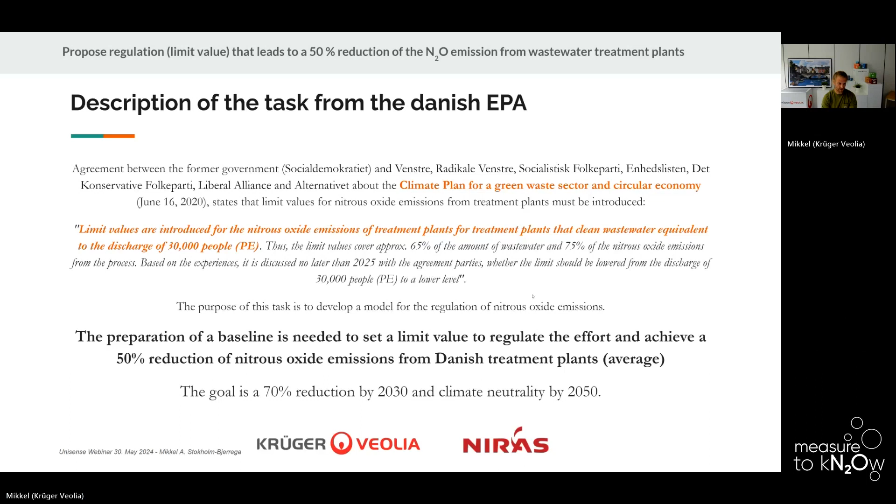Back in 2020, the former government decided that we needed to take action on climate gas emissions from nitrous oxide in wastewater treatment plants. So they decided on a goal to implement a limit value for N2O emissions for all Danish wastewater treatment plants treating wastewater for more than 30,000 people equivalents. It is a 50% reduction target with an expectation to increase this to a 70% reduction by 2030. The 50% reduction is to be in effect from 2025. So it is quite close.

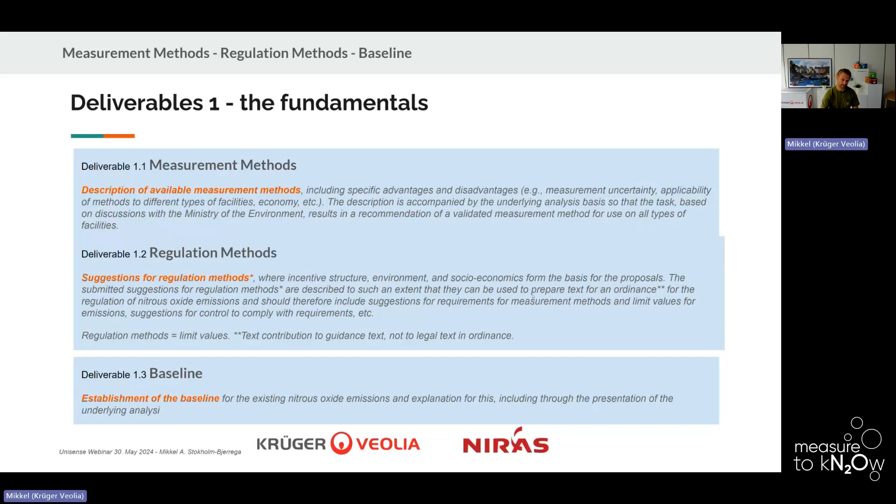The work we have done here, we have done together with another consultancy company called NIRAS. It was divided into two sections, a fundamentals section and an implementation section. In the fundamentals section, we cover three areas: the measurement methods, the regulation methods, and considerations on the actual baseline from Denmark on nitrous oxide emissions. In the implementation section, we include perspectives on guidelines for how to measure and how to control or regulate. We also consider effects of including treatment plants smaller than those treating 30,000 PE and more. And then we consider, among other things, costs and shadow prices of measuring and mitigating to the target of a 50% reduction.

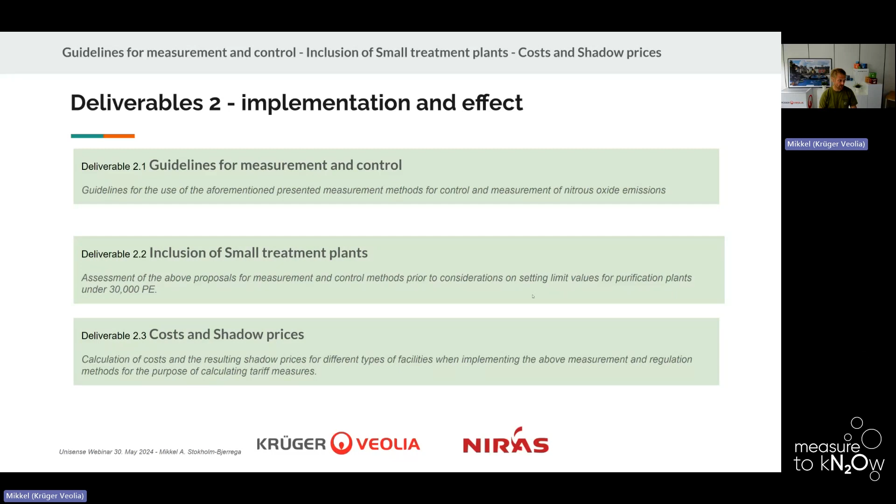So jumping straight into it, measuring methods to measure accurately. There are two basic principles that we covered, 4 methods and many technologies, but in essence, still few solutions. The overall goal is, of course, to determine the actual N2O emissions. To do that, there are two principal methods, as we see it. One is the process-specific measurements, which include a local, often online sensor or online analyzer, with off-gas sensors or liquid sensors. The off-gas sensors are often made up of a gas hood and an associated analyzer.

Those are process-specific methods. Then we have the plant-wide methods, of which in this case we considered two: the trace gas dispersion method and the drone flux method. Both of these methods measure, or aim to measure at least, the actual combined emissions from a whole wastewater treatment plant. And this also covered chimney off-gas measurements from covered plants, which obviously also include the whole emissions of the plant.

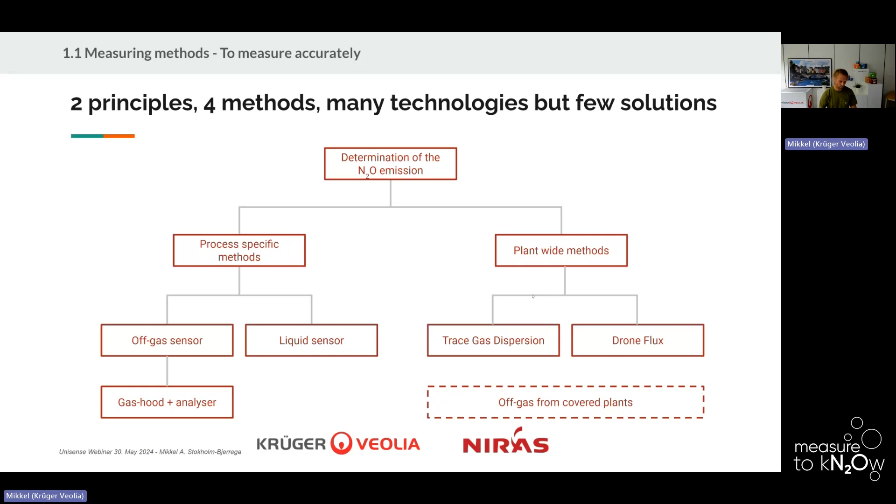So that is the basic difference: the process-specific measurements often include online sensors placed at a local point in the wastewater treatment plant, measuring frequently and online, but require further data post-treatment to calculate or estimate the full plant emission, whereas the plant-wide methods tend to be more of a spot sample, which is not online, but include the whole plant emissions. Those are the basic differences between the two.

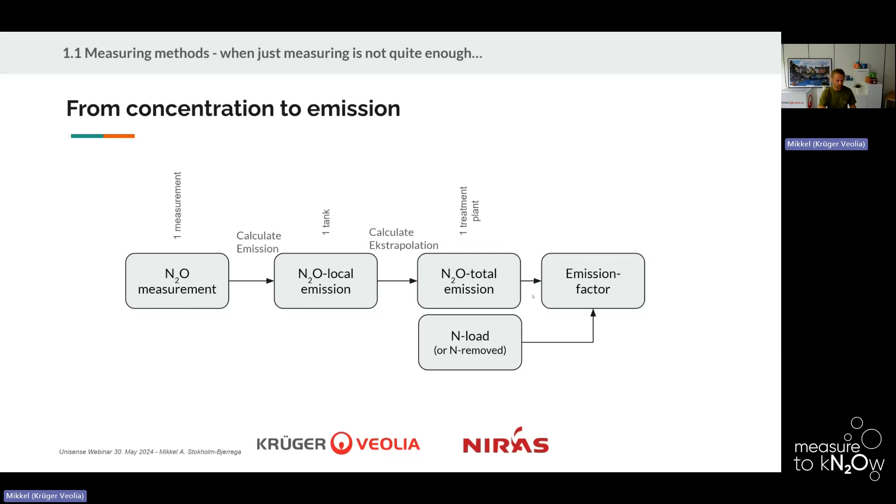And in that, you need to add knowledge of the nitrogen load to the plant in order to calculate the emission factor. All of these steps from concentration to emission are associated with uncertainty, but it's important to represent the true emission of a treatment plant. And especially if the goal is to document the effect of mitigation strategies, it's important to have comparable measurements of the emission factor before and after. Also, if you want to compare between plants, it is important to have comparable ways of doing this.

Very basically, the first question one needs to ask is whether you want to apply an absolute or relative limit value. So is it kilograms total per year of nitrous oxide that is the target, or is it a percent emission factor, for instance? Further on, for each of the categories, you have various ways of constructing a limit. You can do a fixed limit, which is the same for all treatment plants. You can have a differentiated limit, maybe stricter for large plants and less for small, or the other way around. You can have a relative limit dependent on previous baseline measurements, and then it's a 50% reduction based on that. So the targets are differentiated because you have a different starting point.

You could also impose an individual limit that is corrected for the potential or ease of mitigation for the plant, so that plants with a large potential for greater reduction have a stricter limit than those who have a real challenge in doing so because they are overloaded and challenged in capacity, for instance. All of these issues need to be considered before constructing the actual limit value.

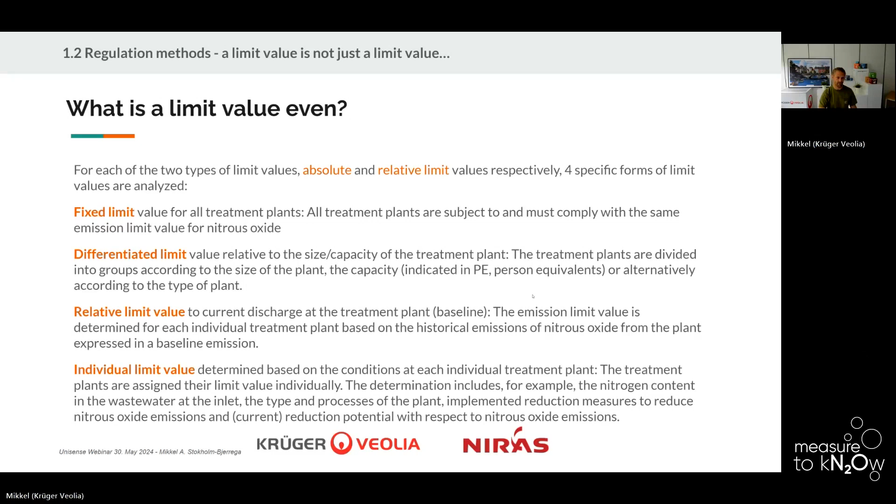Again, the target here was a 50% reduction using a limit value. It makes sense to go further with an emission factor, which would then be the relative limit. And it is also meaningful to have a realistic starting point, perhaps starting with a fixed value, and then over the years, as knowledge increases, move more and more towards individually adapted limit values. But obviously, those require more background knowledge before being able to do that in a fair and cost-effective way.

So what is the starting point even? Because the government here was very ambitious, and they stated an ambition of a 50% reduction without perhaps truly knowing what the starting point was. Thankfully, we already had a previous project trying to determine the national specific emission factor for Denmark. In this study, it was shown that in Denmark we have an emission factor of 0.84%, which is lower than the IPCC value for Europe in general. But it is not based on a large number of wastewater treatment plants, but a selected few participating in the project. As part of this project, we tried to extend that data foundation to validate whether this value was representative of the national state in general.

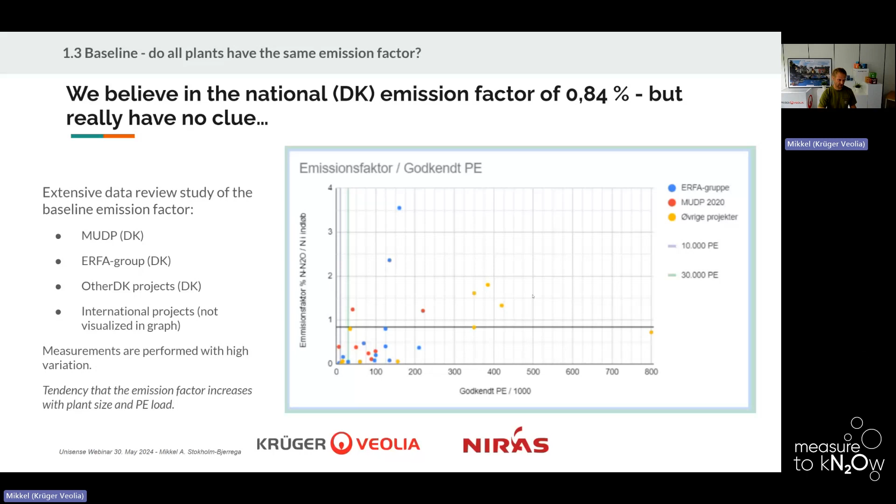What comes first? This regulation could be the approach to start having more intensive measuring in order to create the knowledge foundation that is needed to adjust the baseline and do the right regulation in the end.

So also we need, of course, to balance the effort we put into measuring and mitigating with the cost associated with it. So we speculate that there might be two methods to do measurement and control of the emission factors of the treatment plants. We call these the basic method and the extended method.

The basic method is in essence that we put only one measuring point in every type of aerated biological process. This would mean that if you can argue that you have 4 or 8 identical activated sludge treatment plants operated in the same way, with the same conditions, with the same behavior, you only need to put a sensor in one.

You can then estimate or guess the anoxic contribution of the emission factors of that treatment plant, and no need to do further additional analysis of nitrogen loading in excess of what is already required by the regulation. A very basic method, primarily designed to increase the knowledge and specify the correctness of the chosen baseline for Denmark.

Then there is also the opportunity to do an extended method, which then would require a measuring point in every aerated biological process, and not just every type, but every actual biological process. It would also require a measurement for more precise estimation of the anoxic contribution, and then extrapolation to full-scale emissions.

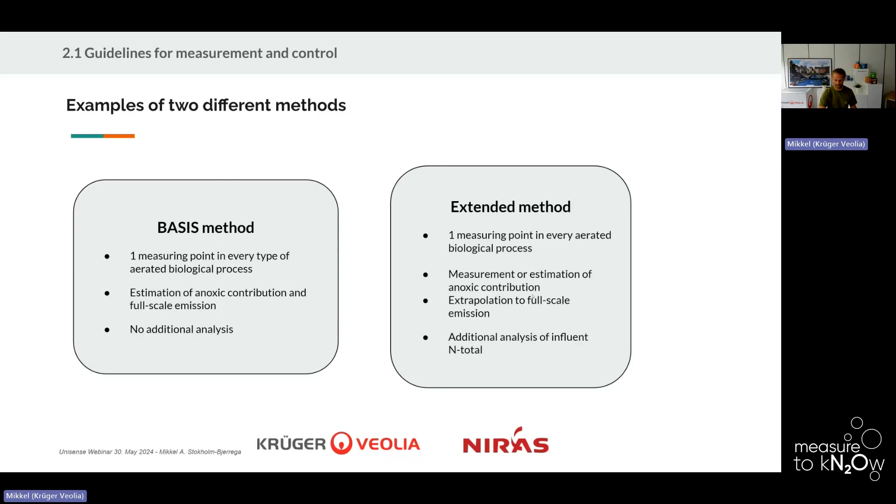It will also require additional analysis of the influent N-total to increase the precision of the calculated emission factors for the plant. We speculate that this could be done in an approach such as this, where the first year after implementation of this regulation would cover a baseline period, a screening period, where we have the opportunity to gain excess knowledge of the actual baseline, and also gain insight into whether or not there is a large diversity of the emission factors between plants

or a small diversity between plants. This is important when we want to calculate the effect of a specific limit value, and whether or not it is able to achieve the overall 50% reduction. Therefore, it also includes the possibility to do a review of the limit value in between or after the first year before going forward.

The point is then, with the one sensor in one tank in all plants, if that sensor implies that we have a treatment plant that is above the limit value, it triggers the need for application of the extended method, where the plants then need to install more sensors or analysis in the plant to increase the validity of the estimated full plant emissions.

So that is the first step to see, okay, that calculated emission value that is above the limit, is it actually above the limit, or is it a measuring diversity, or not an error, but is it insufficient to describe the true full-scale emission from the plant? If that is then the case, it also triggers the need for mitigation for that.

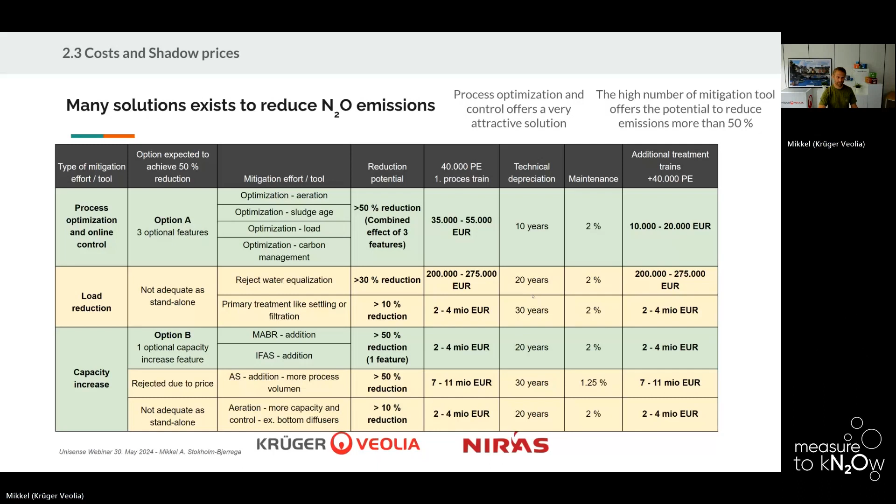So to wrap up, we estimate that it is possible in practice to introduce a measurement method and a regulation method that can be brought into play already from 2025 in Denmark. The current baseline we have established is a good starting point, but it is essential that it is qualified when the measurement program is implemented and we gain a lot more knowledge of all the plants that have not so far been measured. The limit value can be arranged so that it is effective, realistic, and fair.

There are reduction measures available that are expected to be able to reduce all of the plant emissions to below the limit value. It also appears that most can be done at a competitive and cost-effective shadow price. And if all treatment plants above 30,000 PE follow the basis method, measurement capex is estimated at 1 to 2 million euros, with a yearly maintenance cost of 0.2 to 0.3 million euro per year, depending on the measuring type. There are, of course, large uncertainties related to this guesstimate.

The optimal estimated cost of measuring and reducing nitrous oxide by 50% offers a potential shadow price down to 6.5 euros per ton. That is, of course, the optimistic target, but just to show. Then on top of this, some mitigations, as chosen before, might even have other substantial added benefits. Some of these solutions could also improve the overall treatment performance of the plant, by improving the nitrogen removal, for instance, or carbon management.

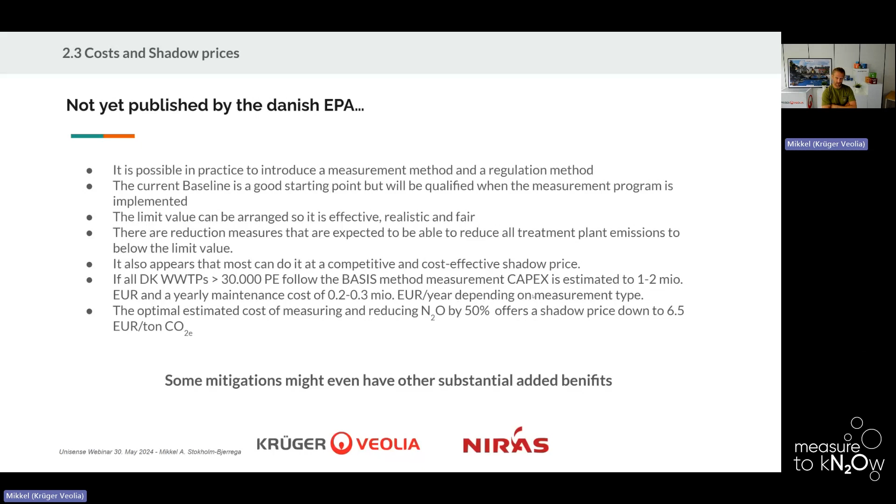Okay. Good. Just credits for the team, Veolia and NIRAS participated in this.

And then I have this final one because I also promised in the presentation to cover a little bit about the development project that we have here in Krüger. This is because, as you saw in the table before, there are a lot of estimates on the effect of mitigation strategies. And we believe and hope that the combination of strategies here are able to

Did my presentation stop now, Christian? No, it's running. I hate to rush you, but we have an absolute maximum of 10 minutes for the last bit of the presentation. Otherwise, we have no time for questions. That will be fine. Yeah, it's very fine.

Yeah, no. Super. Yeah, thank you.

As you can see from that table, to achieve the target of the 50% reduction, the effective mitigation strategies are very important. But very limited documentation is actually available on how these different mitigation strategies are able to achieve that over a long-term period under normal operation.

Most of the experience we have has been done in shorter term or in dedicated experiments with a particular focus on that. But when we need to implement this in normal operation under all of the other targets and goals that a treatment plant has, the challenge is harder. And so we need to have documented effect over long time under real operation.

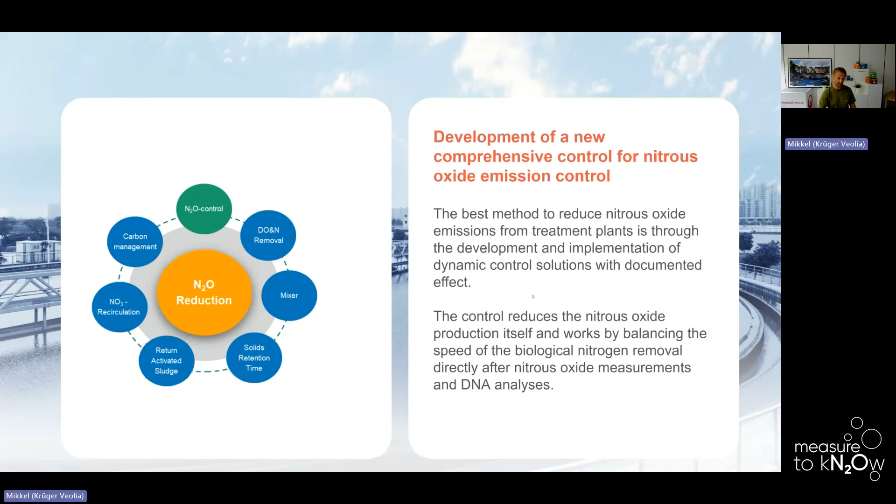This specific control we want to develop focuses specifically on preventing the production of nitrous oxide by gaining control of the speed of the biological nitrogen removal in the process and includes actually DNA analysis as part of this task. The project is a 2-year project where 1 year is baseline documentation and 1 year mitigation and validation year.

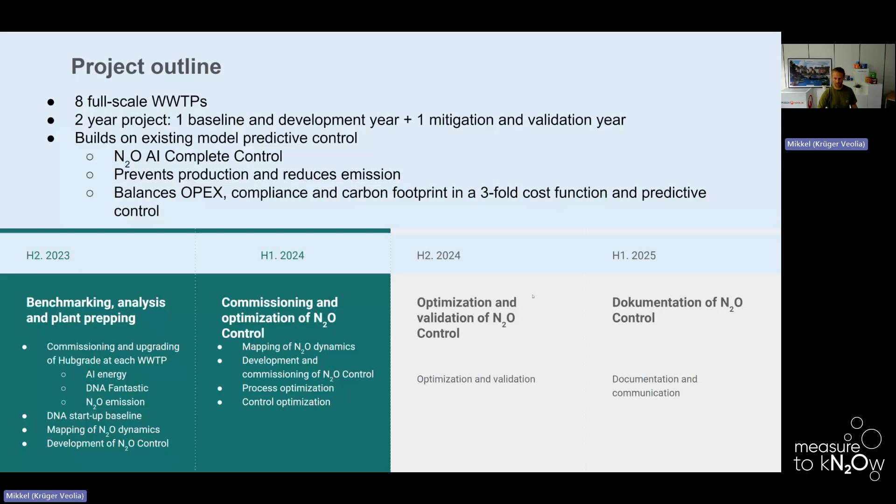In this period, we are now currently building the new nitrous oxide artificial intelligence complete control that targets the prevention of production and reduction of emission. And the point of it is to balance these 3, OPEX, compliance, and carbon footprint, in a 3-fold cost function with a predictive model. We will soon be starting to do commissioning of the control. Now we have what we call the standard artificial intelligence feature running on most of the plants, and will gradually increase for the control for N2O and then document effect.

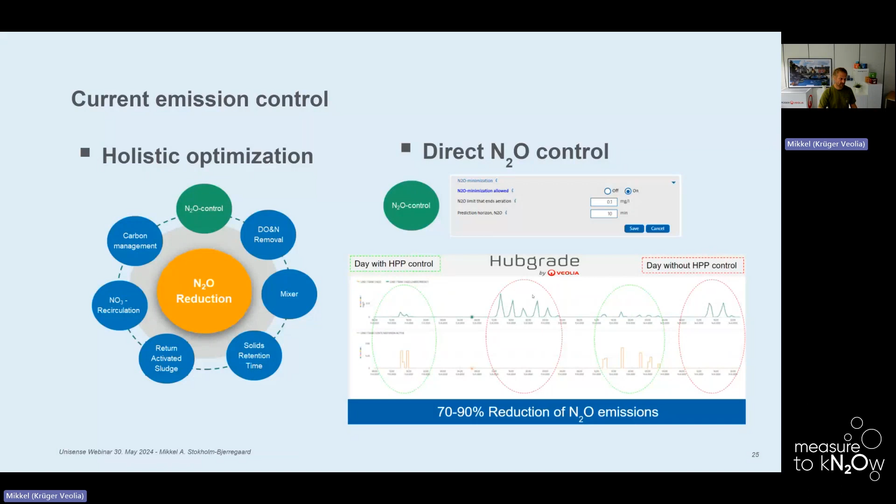The very basic control that we have already as part of the Hubgrade system is that we have a direct N2O control able to limit and reduce the emissions simply by turning off the air if the concentration is high. It's very simple, but it's also very effective. It is also what triggers an early denitrification phase, enhancing the removal of undesired N2O produced in a previous aeration phase, for instance. What we need to handle still is how do we do nitrification without associated N2O production.

And we want to achieve that by gaining control of the specific nitrification rate of the nitrifiers present in the activated sludge. And we do that by combining online control with the dynamic prediction in artificial intelligence models and insight into the DNA and nitrification capacity of the actual plant biology.

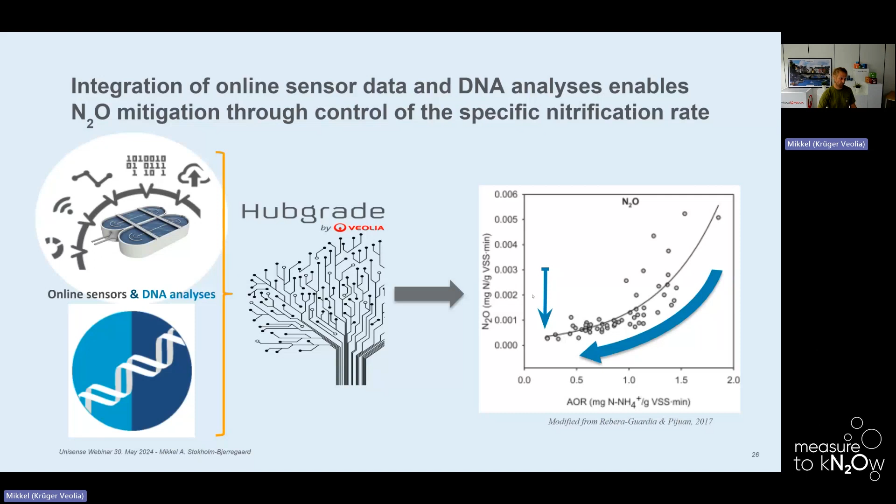So we just need to predict the future, control the specific nitrification rates, measure nitrous oxide, and adapt and balance the aeration intensity, nitrification phases, DN phases, all to a maximum benefit of balanced energy consumption, carbon footprint, and effluent quality. Easy peasy.

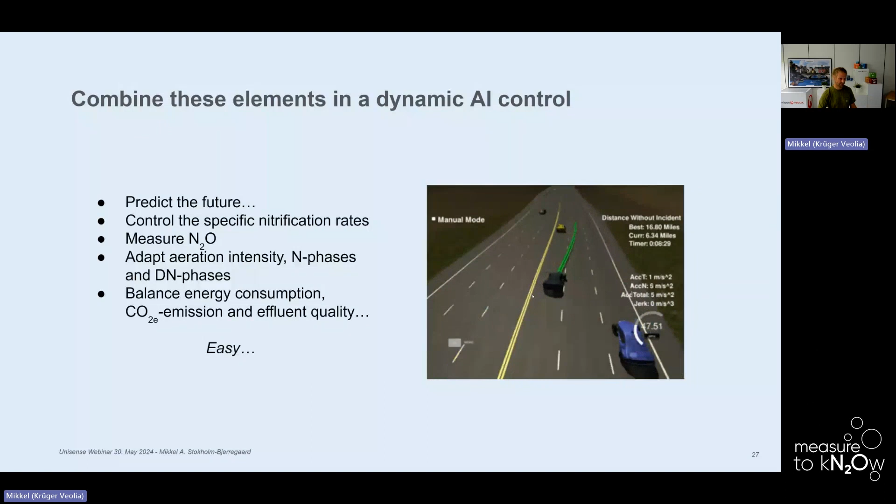So with that speed talk here in the end, I hope I did not exceed my time too much.

And today, I hope to inspire you not only to unite on a national level, I will talk about the Dutch acceleration research program, but also to start measuring on site level, because we can all contribute in this road to net zero. So for the Dutch national approach, let me take you along on our N2O journey, so to say.

we are heading towards the European Wastewater Directive, still in draft, but I believe the effluent requirements are more or less set. So for large wastewater treatment plants, we are heading towards a total nitrogen effluent requirement of 8 milligrams per liter and 0.5 for phosphorus, and 10 milligrams per liter for nitrogen. So that is something we are heading towards and also prepare our treatment plants for. And then there's the ambition to become 100% climate neutral, so net zero in 2035.

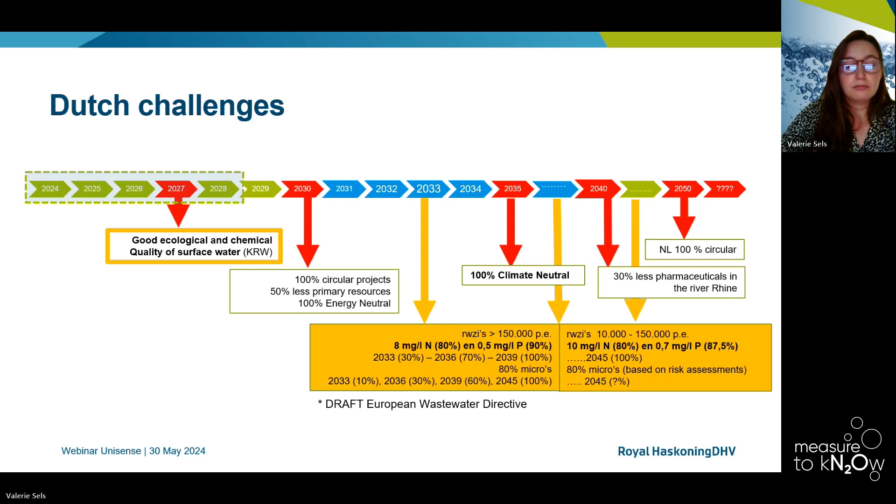Now, what are the objectives of this program? The program is divided in 3 research lines, so to say. The first one is clearly to gain insight in our national emissions. Also, Mikkel talked about measurement methods. We'd like to make sure that everyone in the Netherlands is doing the same thing, so we want to make sure those are validated and clear for everyone. And then really gain an insight on this national level, but also see if we can play with those emission factors a little bit, similar to what Mikkel already showed us. I will explain this in more detail later.

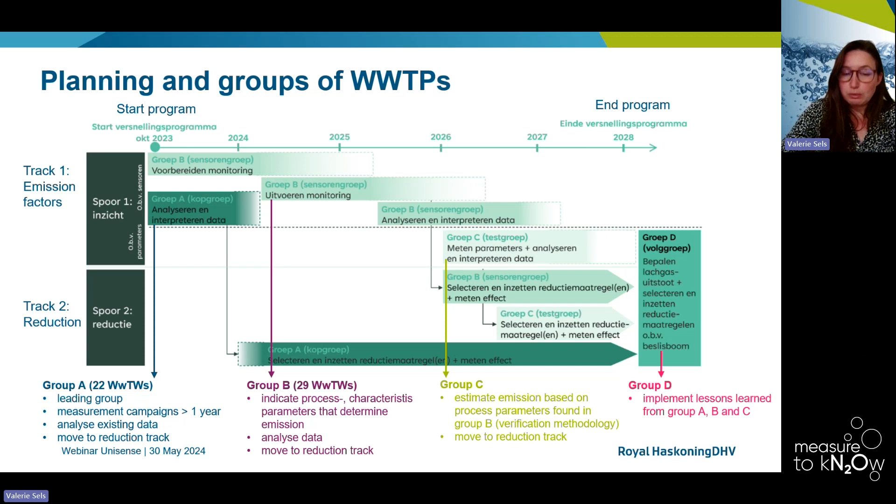So, as I said, group A is already well underway, and with group B, we wanted to make sure that we have this good representation from the Dutch wastewater treatment plants. So we looked at all those more than 350 treatment sites in the Netherlands, and we looked at, okay, what can we differentiate them on?

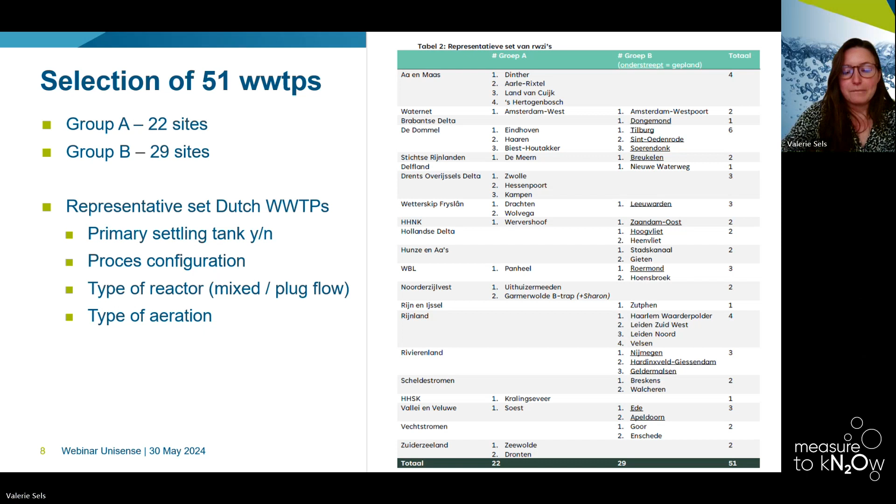And how did we make this selection? So I already talked a bit about this emission factor and how we'd like to further make it more specific. In the community of practice these last couple of years, together with STOWA, there was this simple risk model developed. Of course, currently the emission factor is calculated based on the incoming nitrogen load, but we believe that it's very useful to look at your nitrite and ammonium concentrations actually in the effluent to determine whether there's a low or a high risk on N2O formation in your treatment plant. So that's basically the first step.

Okay, categorize the wastewater treatment plants in these two categories. We have adjusted this model already once. There's a STOWA report on that for whoever is interested. And we hope to further update this model. But after the categorization, we looked at the influencing factors like configuration, reactor type, nitrogen load, etc. And we were also already trying to find correlations or trying to explain the differences between those low and high risk treatment sites.

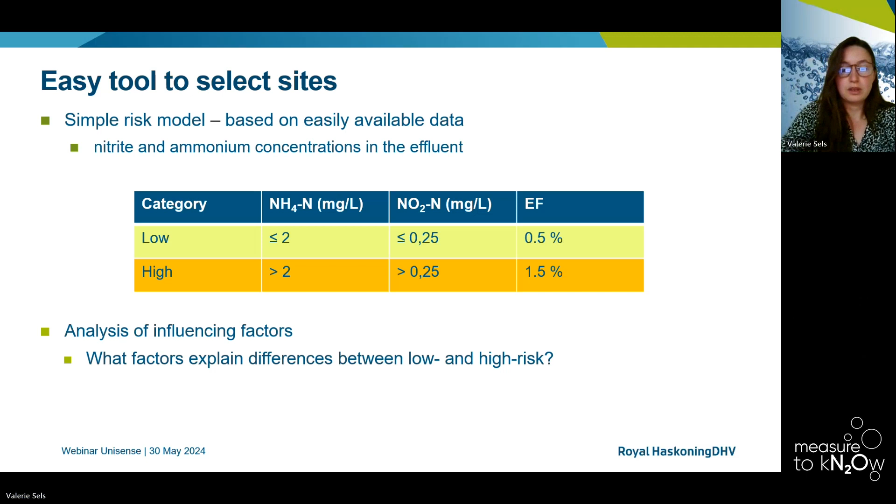So our analysis showed that actually the type of reactor, so whether it's a mixed or a plug flow reactor, has an influence on whether a treatment site is low risk or high risk. The type of aeration, we weren't really sure. That is something we'd have to look into more when we get more data. Also, the nitrogen loads: it was striking that a lower nitrogen load was mostly found with low risk treatment sites, and then also the total nitrogen in the effluent, so again, better effluent quality for low risk treatment sites.

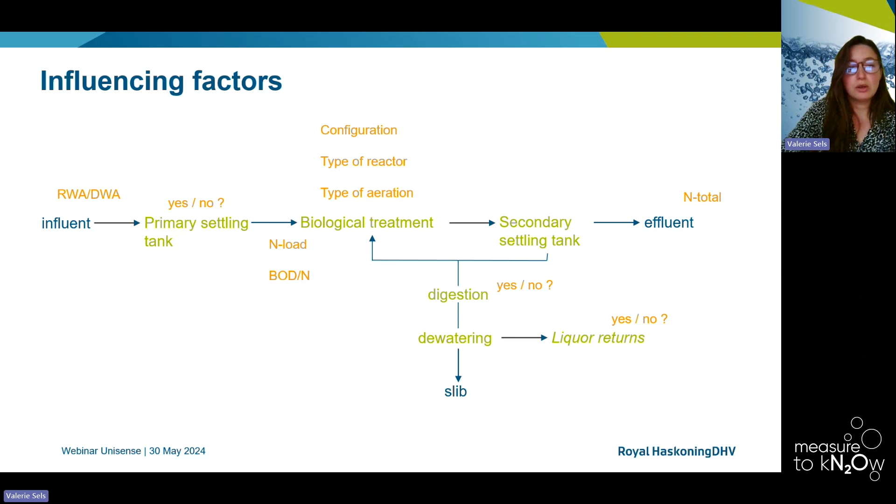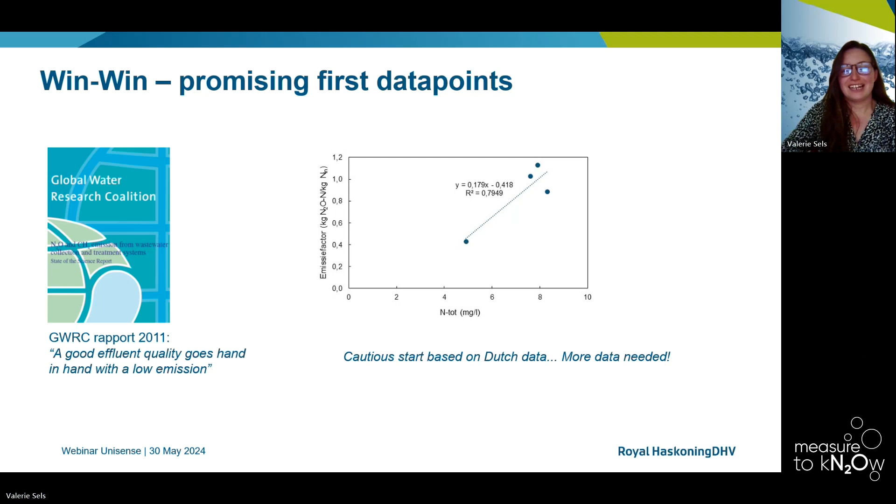Then data analysis from Group A will start before the summer. Group B are installing the sensors on the remaining sites, and as I said, the program is expected to run to 2028, with, I'm sure, a lot of data coming our way. And with that, I'd like to conclude.

And lastly I wanted to thank Bastian for giving me this podium. But I also like to emphasize that especially this Dutch National Acceleration Program is a joint effort from all the Dutch water authorities. It's supported by STOWA, the Unie van Waterschappen, the ministry, and all other governing and knowledge institutions. So it's a big thank you to the sector really for doing the right thing, even though, unlike in Denmark, there's no binding legislation yet in place.

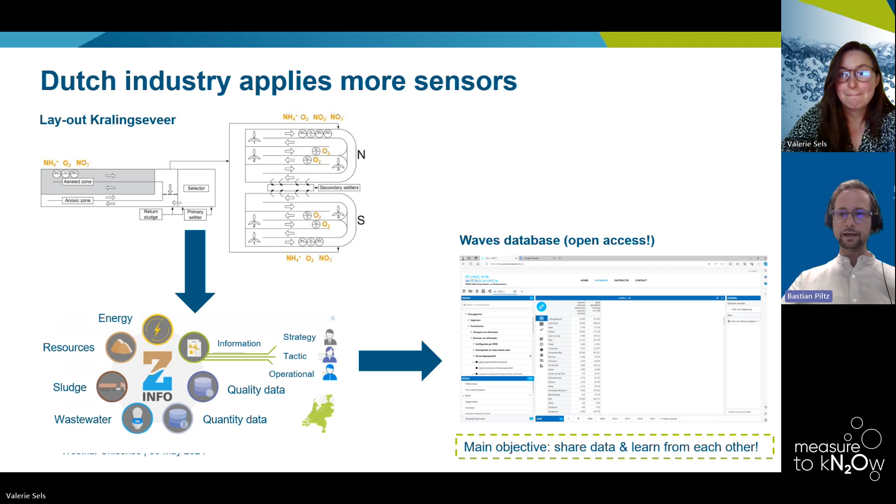Thanks a lot, Valerie, for expanding on that. And I think with that we can move to the next presentation, which will be Bharani Sri. Just waiting a second for him to come up. Fantastic. Hi, Bharani.

Bharani is the process emission monitoring lead at Severn Trent in the UK. To my knowledge, Severn Trent has, among the water companies in the UK, the longest and broadest measurement campaign of nitrous oxide on their treatment plants. And so, for that reason, very, very happy that you're here today and that you're willing to share some of the learnings and experiences from these measurement campaigns. Thanks a lot, Bharani. The floor is yours.

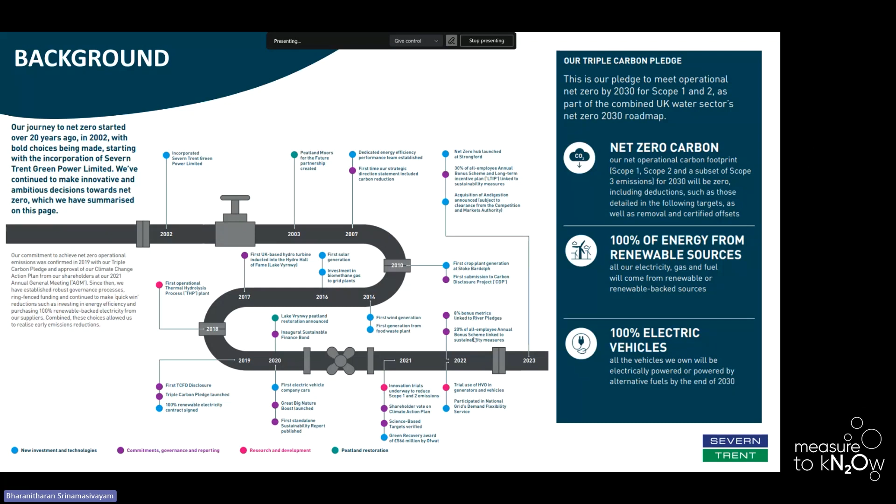So if you take a closer look at our direct scope 1 emissions, around 80% of it comes from nitrous oxide and methane from our sewage treatment and sludge treatment processes. The raw material that turns into these greenhouse gases comes from people's homes into our treatment works. We can't really control that, but what we can do is work towards minimizing the conversion into the greenhouse gas and its subsequent release into the atmosphere. And over the past 3 years, we've been widening our monitoring to better understand the source of these emissions and explore potential mitigation opportunities.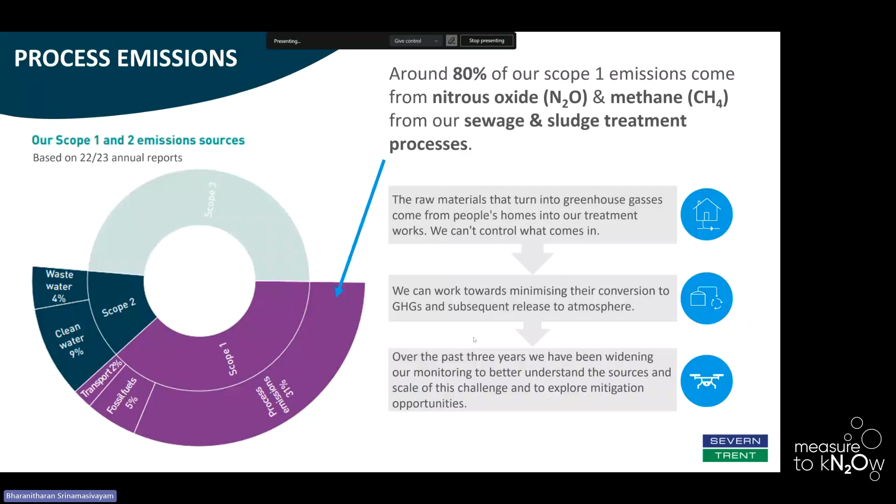So I'd like to focus on nitrous oxide here for this meeting rather than methane to keep things interesting. So with nitrous oxide, the activated sludge plants appear to be the biggest source of nitrous oxide emissions, and the way we are currently monitoring that is by using the dissolved N2O sensors from Unisense. We place them approximately 1/3 and 2/3 of the way into the lane, and then we measure a number of other parameters to enable the conversion from the dissolved nitrous oxide into the gaseous emissions.

And a couple of practical learnings that we've had in setting these up on our site is definitely send all the measurements to the telemetry for faster and more streamlined calculations, but more importantly, having that live access to the data has really helped us identify some of the issues early, whether that be sensors going offline or any other parameters, not just any sensor, any airflow or temperature or anything like that, having any kind of problems, so we can spot them early and get them rectified so we're not losing valuable data. Especially with something like N2O, which is incredibly seasonal and diurnal. So it's important to capture this information.

And then also having this data in a single place, what we call our data lake, has enabled us to use things like machine learning to get better insights from our data, which I'll talk about a little bit more further down. And then we've chosen to express our emission factor in terms of measured nitrous oxide in the lane, per measured ammonia going into the lane. So that's your settled sewage ammonia.

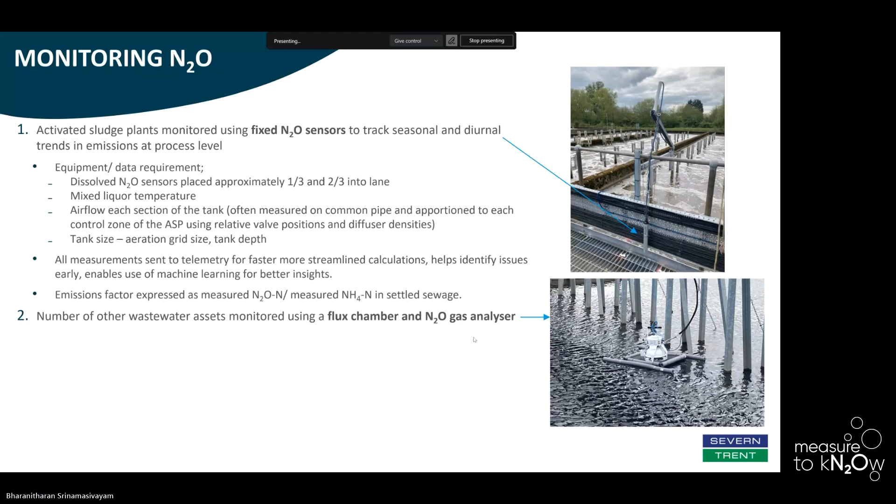So one of the recommendations further down is that might be the other asset that we consider directly monitoring over a longer term. So if you wanted to look at some of the results, I think this type of trend, I'm sure a lot of us have seen in the past.

So what it's showing is the different financial years. So that is April to March, and then we've been monitoring over a 3-year period. The red line is just this financial year, so that shows you what April and so far in May looks like. So that's 3 full years of data, along with the 4th year of a little bit of data.

And the main things I want to draw out of these is that seasonal pattern, which I think a lot of us are expecting to see these days. And the important point there is, yes, there is a seasonal pattern that seems to happen around the early spring time. But that itself does move around, so the bugs don't have a calendar, so they're not always going to go in April. So the first year we monitored, that was in April when we found the biggest emissions.

However, since then, that has moved around a little bit to happen slightly earlier. And interestingly, in last year's monitoring, we didn't really see much of an emission spike. That's the green line, where we saw a little bit around June time, but it was fairly muted compared to some of the previous years. And interestingly, this year appears to be following the same trend.

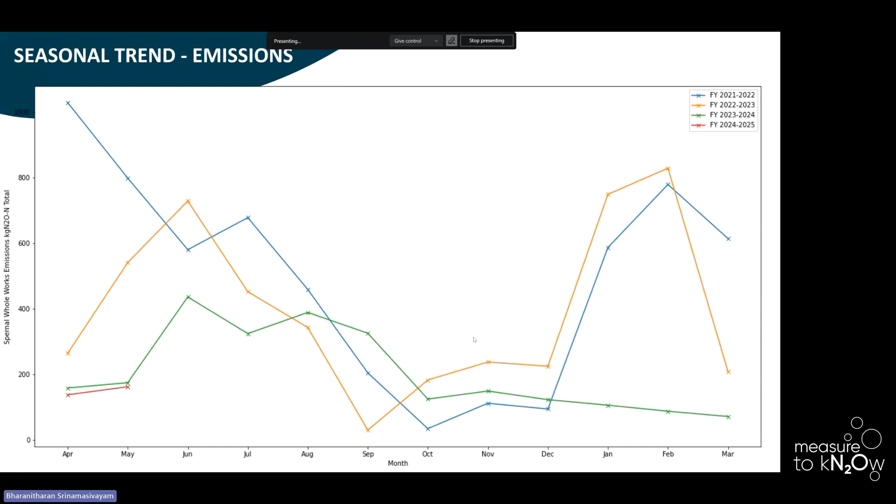So this is without us making changes to the monitoring. So we've not moved it, or we've not increased the load or changed any of the site processes. So it's really interesting to see that the same site, same setup is resulting in slightly different emissions year on year. Other than that, it also doesn't appear to be load driven.

So that's our main emissions mass trends and the emissions factor trend. So like I mentioned earlier, we had originally baselined our company emissions based on a single site, which is this site. However, we then decided we needed to monitor more sites over a longer term period to better understand if this factor is going to hold, or if that is something where you'll have site level differences.

With the data that we've been able to collect so far, I think we can make some comparisons. I've not got them in the slides here because it's not the full years for all of those sites. But what we are able to see is there are site level differences. So it's important to monitor the broad range of processes that your company might be implementing at your sites to get a better understanding of your emissions.

So the other part is, one of the reasons to get the data onto telemetry and collect over a longer term period is you can start doing some really fancy stuff with the modern tools like machine learning. So one of that is soft sensing. The concept here is building a virtual sensor using machine learning models, where we've trained it using 3 years of data collected from Spernal. I said 3 years, it's approximately 80% of that 3 years. So 80% of the data is used for training, and the remaining 20% the model training process does not see. It's just used for testing.

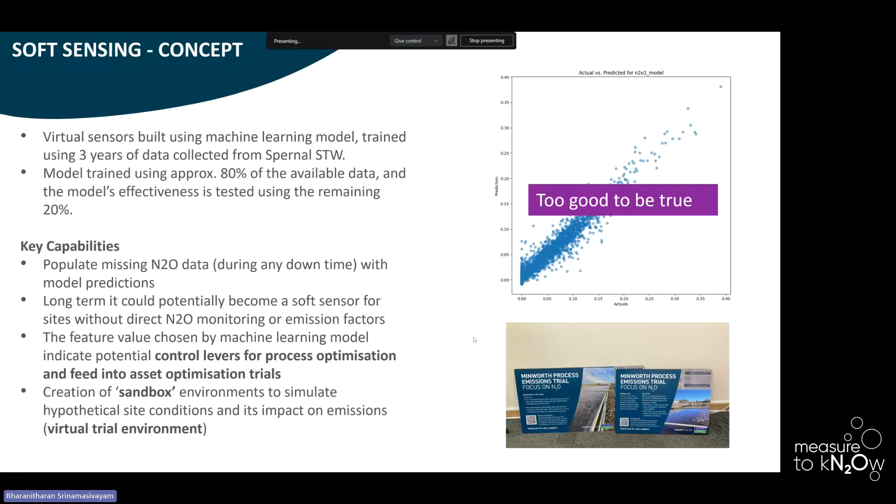And the unfair advantage we had given the machine there is we know that N2O emissions have a seasonal and diurnal pattern, and the machine also learned that. And when you're getting it to predict random values, it most likely knows what came before and what came after, so it had a very easy time predicting it. So we scrapped that. Let's do something slightly different, where we trained it using the first 80% of each quarter of the financial year, and then got it to predict the last 20% of that quarter.

So I think having a soft sensing model as a proof of concept, I think we're there. We think it's something that's definitely feasible. However, we are constantly tweaking the system to make improvements, and we think this will only get better as we feed more and more data into the system over a longer period.

However, the learning has definitely been that this is valid for Spernal, the site whose data was used to train the system. It's not likely to work for any of the other sites. And at a conceptual level, creating a general machine learning model that will work for all sites may be possible. We don't really know, but it may be possible, only if we are able to feed this level of data into a machine learning model from across a number of different sites, and then maybe with enough data in the future, something like that may be possible. But at this moment in time, we don't think we're there yet.

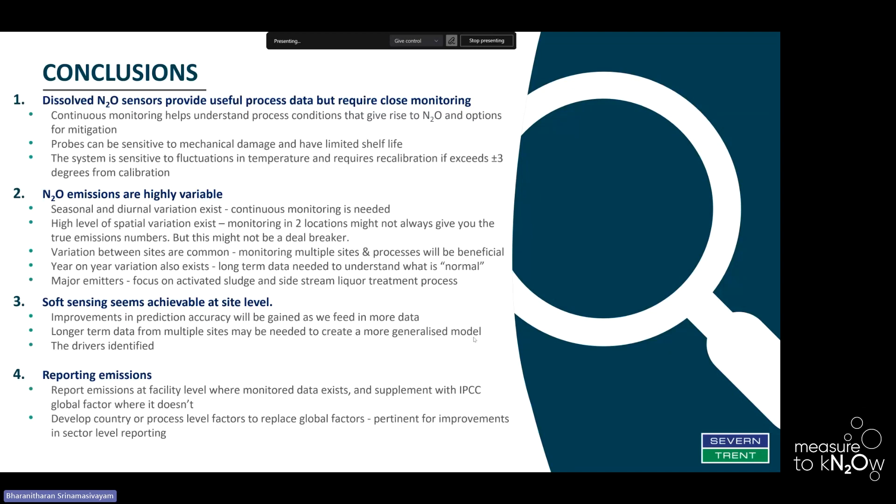So that's pretty much it. It's a quick tour around our current learnings from monitoring. Hopefully that's helpful for anyone that is considering doing some monitoring yourself.

Fantastic. Thanks very much, Bharani, for a very concise and very in-depth presentation. Very interesting insights. Thanks also for the note on how important good maintenance and calibration of the sensors is. Only a well-maintained sensor, of course, can give useful data. I can see there are a few questions in the chat or in the Q&A, so I'll just pick the first one.

Maybe you can shortly comment on the flux monitoring hoods, whether you can recommend a supplier for this type of measurement. So the supplier that we use at the moment is LI-COR. It's their smart chamber and the LI-7820 gas analyzer. We're also currently testing Aeris, their gas analyzer, but I haven't got any news to share on that front yet. Maybe I can follow up after this call to see if they're comparable and easy to use.

But the main one that we're using at the moment, just jump into the picture, is the LI-COR gas analyzer in a float that we made with some loft insulation. Yeah, I think one very important thing to note on that is also the size of the area that is taken in, of course. Yes. There was a question around the dissolved sensors needing to be underwater. That is, of course, true. They need to be fully submerged in the water to feel the actual water temperature, as is described in the manuals as well.

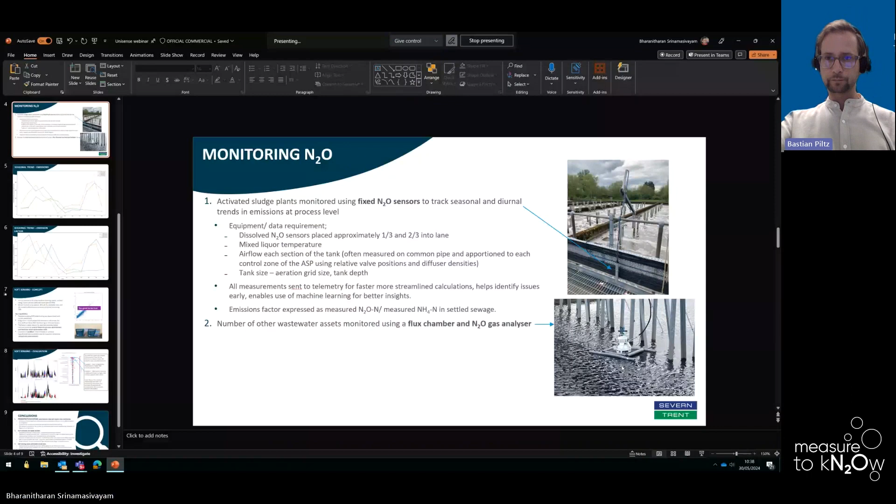If you could just turn off the mic, Bharani, for now, that would be great.

Thank you. So yes, as a last point on the agenda, we have a few more poll questions that we'd like you to answer now, also with the knowledge that you have gathered in this webinar, hopefully. Well, the first one is, if you were to design a measurement campaign of nitrous oxide across your own company, wastewater treatment plant where you're working, what would be the 2 most important factors in designing this measuring campaign? If you can have a look at that and give us your input, that would be great.

So we have a good number of responses coming in. I see that the leading response is, well, not fully clearly, but the leading response is the applicability for process optimization. So actually being able to use the measured data for reduction in nitrous oxide. I think, yeah, most practically, that is what we all want to do. Measure the emissions and then be able to act on them, reduce them. Of course, as we want to reduce the climate impact of our wastewater treatment.